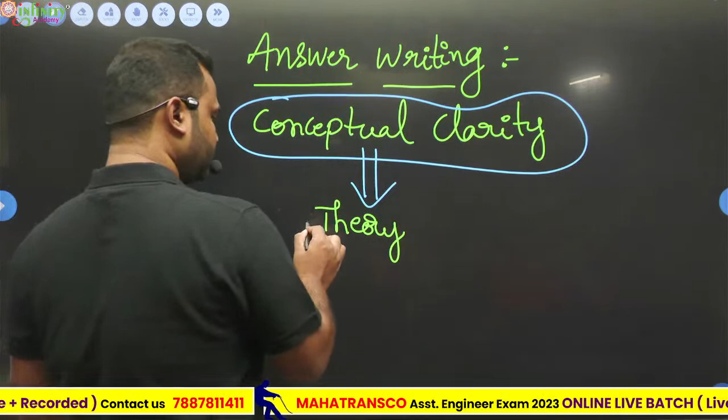After theory, any formula present in that, maybe derivation or application of that formula. In civil engineering, not all formulas are derived. There are some empirical formulas which are based on experience and experiments, mainly found in geotechnical engineering, soil, and even in our code books like IS 800 corresponding to steel and IS 456 corresponding to RCC.

IS 1343 corresponding to PSC, pre-stressed concrete structures. So likewise, not all formulas can be derived, but whatever formulae or provisions exist based on theory, you should remember. And obviously based on this formulae, we need to make use of this formula, that is the application part.

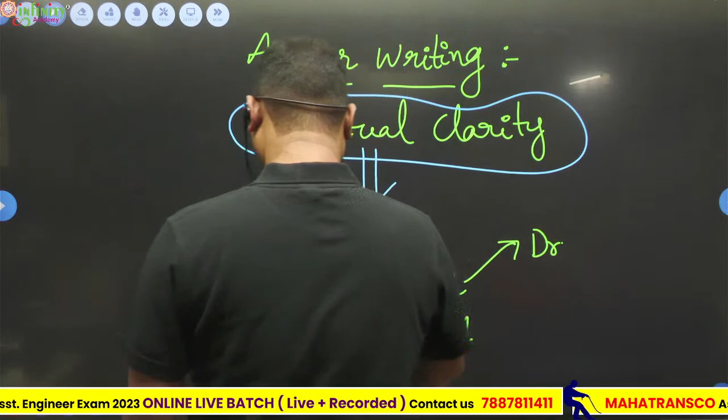Of course, these formulas, some may be derived, and some others are empirical. But whatever the formula might be, you should understand and ultimately remember it. But for remembering any formula, whether derived or empirical, one should feel the subject. It means you should be able to understand what is happening over there, what are the various terms present in that formula.

Suppose you take one simple formula. What are the subjects that are completed for you? Highway, geotechnical engineering - let us take geotechnical engineering as an example. So almost all the topics are completed. Now what's the topic going on? Shear strength. Let us take shear strength, one formula.

I'll explain how to remember it without any by-hearting or mugging up process, without any by heart. How to remember? I'll explain one or two formulae. Shear strength - generally we represent shear strength with either tau or S, whatever it might be. What is the formula for the shear strength?

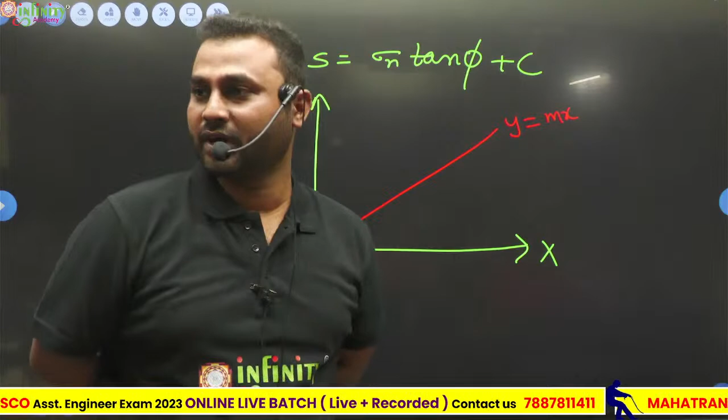So please don't commit these kind of mistakes. Then God will also not save you, he will also not come under your rescue. You should have that conceptual clarity, from the basics. From 7th standard or 8th standard, whatever you have studied, all those things you should recollect or remember. Why? Because you have crossed those phases, right? Are you past 8th, 9th, 10th, all the classes? All of you? Pakka? Then you are taking that it is y is equal to mx plus c.

It is y is equal to mx as it is passing through the origin. Right, as it is passing through the origin. And what is this equation? Equation of this line? Here, this equation of line. Y is equal to c, constant.

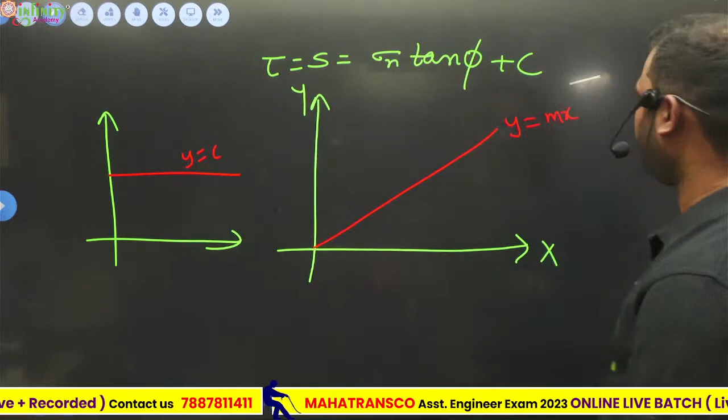Of course, c means constant. Yes, correct. And here I will draw. Now, what is this equation? What is this equation? Y is equal to mx plus c, isn't it?

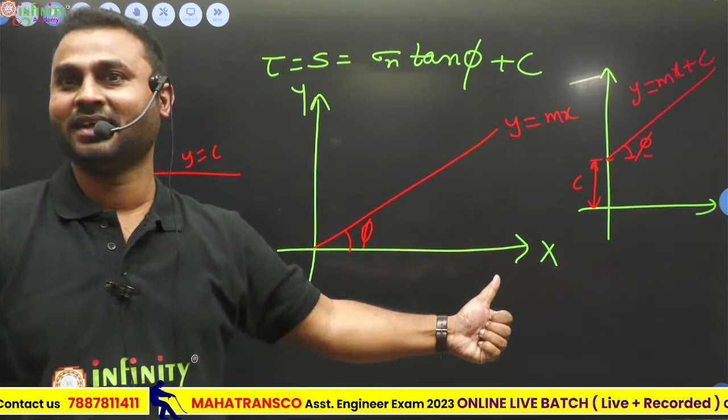These three are only the basic for shear strength formulae what you study. These three graphs are these three equations what you have studied in 8th standard, if I am not wrong. These three equations are basic or foundation for shear strength formula.

In shear strength, I think you might have studied Mohr circle. That Mohr circle is plotted between normal stress on x-axis and shear stress on y-axis, isn't it? And after drawing the Mohr circle, we draw the common tangent, which is called Mohr Coulomb envelope or failure envelope. So based on that Mohr Coulomb failure envelope, we write this particular formula for shear strength, isn't it? So now I'll compare this concept with that.

And in shear strength, you might have studied the types of soils also. What are the types of soils you have studied there? Soil is having so many classifications. Based on the size, the classification is fine grained and coarse grained. Based on some plasticity characters, there is another classification. So all those things you study in soil classification, leave it. But here in shear strength also there is one soil classification.

That is C soil, Phi soil, and C-Phi soil. So how is this classification made? Based on shear characteristics of a soil. It means any soil will possess strength mainly by 3 parameters. What are those 3 parameters? Friction, cohesion, interlocking, and adhesion. So if particle size reduces, surface phenomena predominates and the contact will be very less. Then there is no friction.

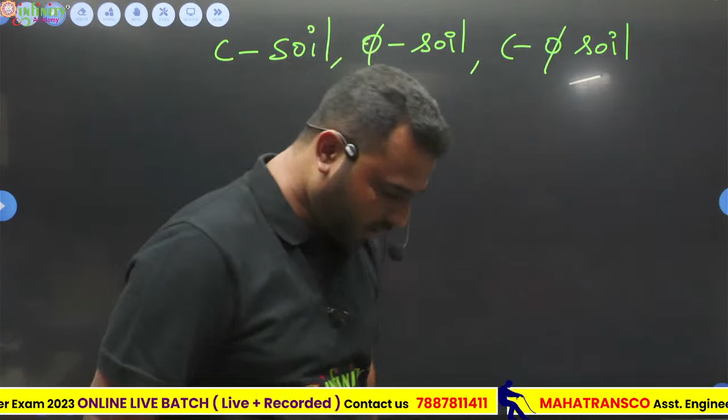So when will friction generate, please tell me. When will friction generate? When there is a contact area. I'm walking on this floor. How am I able to walk on this floor? Because there exists a contact between my foot and the floor. Because of that contact, friction will develop. That is why I am able to walk, or else I will simply slide and fall down. So for friction to develop, there should be contact area.

So for that contact area to develop, size should be more. That more size we observe in sand and gravel, but not in clay. Therefore, mainly coarse grained soils like dense sand, sand and gravel will exhibit shear strength by friction, isn't it? Whereas coming to clay particles, size reduces, therefore surface phenomena predominates. That is development of charge over the surface. Because of that, attractive forces will develop, known as cohesion and adhesion.

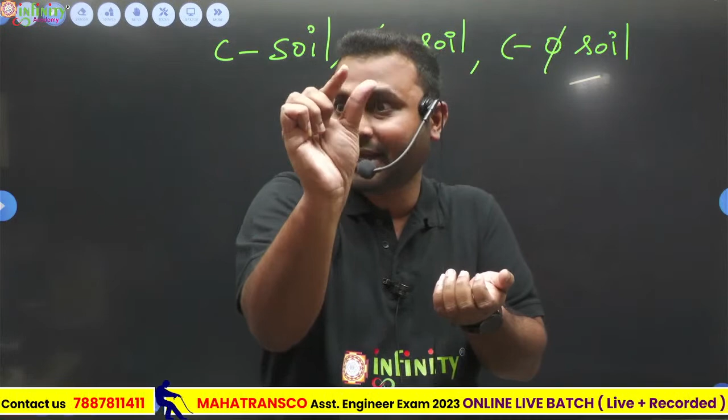And interlocking - if size further reduces, like angular particles you might have studied, interlocking will occur. Why? Because there will be some projections of the particles on the surface. Suppose this is the surface, there will be a projection like this, and for another particle there will be a projection like this, then interlocking happens. So how do we measure this interlocking, friction and attractive forces?

Based on these parameters - C, Phi, C-Phi - and based on that, there is a classification. So like this, you need to understand the subject, or like this, you need to analyze the subject, right? So now, these 3 types of soils.

Of course, if I go into further details, then we are having some different stages of testing and different drainage conditions. That is not our point of discussion at this point. Why? Because the shear strength alone will take not less than 4 to 8 hours if we discuss the total experiments and total conditions and everything. So that is not our main point of discussion. But what I am trying to tell you is how to remember the formulae, or how to see the subject, or how to feel the subject.

So if you understand the subject in a practical manner, or in other words, if you visualize the subject, what is happening in the soil, if you are able to feel or visualize what is happening inside the soil, then there is no need to learn by heart, right? Obviously, you will remember for more time, at least up to the examination. Till the end of the examination, you will remember it. That is what is required, right?

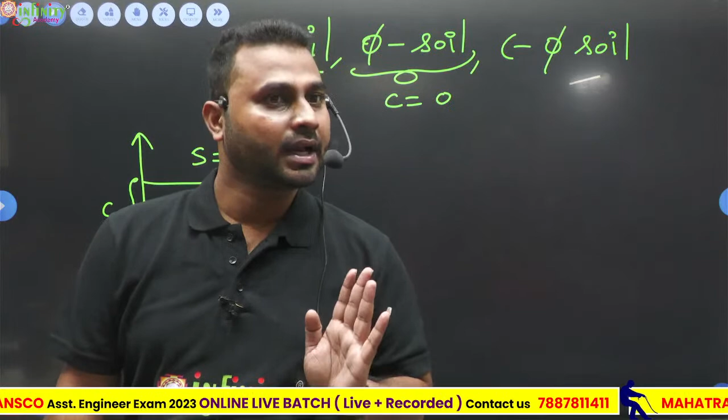And the test can be done perfectly in 2 stages, the confining stage and the shear stage. And all the drainage conditions like UU, CU, CD can be achieved in the triaxial test. Isn't it? So based on that, we can derive phi and C. Those are called shear parameters. So whatever experiments we are going to carry out, all of them are meant to determine shear parameters only. And based on the shear parameters, we can determine the shear strength of a soil corresponding to its type.

Means all soils don't possess the same type of shear properties. Some soils will have some properties only. And even if you see C soil, okay, C soil, the best example of C soil is clay. But see, the very same clay behaves in one manner in undrained condition and in a different manner in drained condition. In undrained condition, it exhibits cohesion, whereas in drained condition, it exhibits friction. So we need to be very careful.

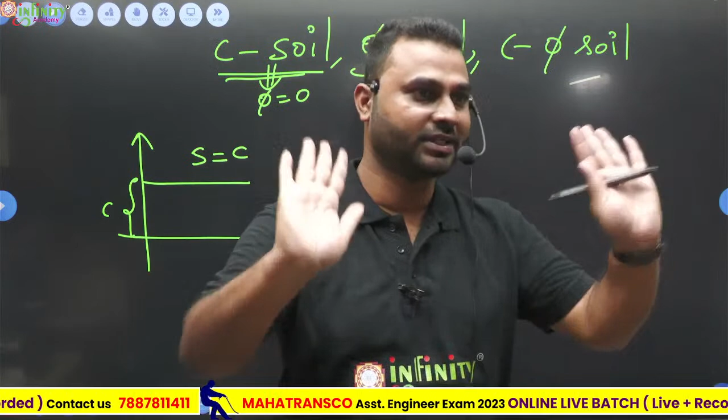See, why is this topic, or why is soil, most complicated? Because there are so many aspects you need to consider. Let me give one small example. If the route to your home is straight, then you will easily go. Yes or no? Even when you are sleepy, you can go very easily, right? Whereas if there are so many turns, U-turns, if the full route is complicated and not straight, and you need to climb a steep slope, then you will feel it is complicated or not? You know the destination, but the route is not straight, so you will feel it is somewhat difficult.

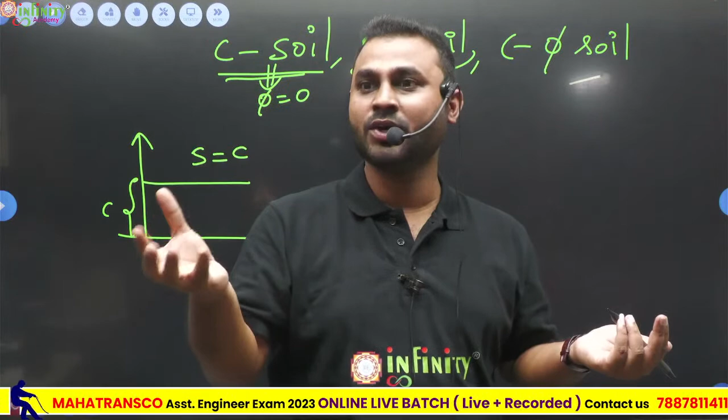The same case with soil also. It is not straight. So many turns, right turn, left turn, U-turn, and even steep slopes are there. That is the reason you feel somewhat complicated with this subject, but it is nothing like that. Provided you are clear with all the aspects, then it is very clear. But it requires time, and you need to study it and understand it more and more. Ultimately you need to spend time. When the route is not straight, obviously you need to spend more time to reach the destination. The same here, that's it.

So you should have that patience, right? The patience, that interest and everything. Ultimately, you are the one who needs to reach your target, right? We are like guides, to show you the right path and to shed light on your path, so that you will feel a little comfortable. That is our part, nothing more than that. Don't think that merely joining an institute, not only this one, any institute, will serve the purpose. You are the one who has to reach your target ultimately. We teach you and guide you in the right direction, and wherever you feel demotivated, we motivate. That is our main role.

Okay. Now coming back to this. So this C we can determine. This is the shear strength. So S is equal to C. This is like Y is equal to C or not? Now here phi is 0. Then what should be the graph? Here the X-axis represents normal stress and the Y-axis represents shear stress.

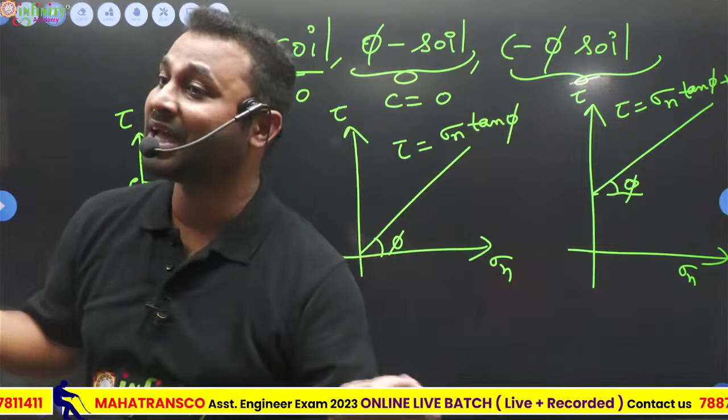Why? Because the very same formulas you have studied in your 8th standard in mathematics, coordinate geometry. But the thing is, you are unable to interlink it. See, whatever subject you study in engineering is not new to you. It is just an extension to the concepts and subjects you have studied in your elementary level, after that secondary level, and in your +1 and +2.

So what generally happens is there is a missing link between the things you have studied in school, +1 and +2, and in graduation. It means you have studied up to here, maybe up to this level, maybe in surveying you study RLs and everything. So this is the level you have studied up to plus 1 and plus 2. Now, in graduation, you study from this level. Now, this is the gap. This is what is missing.

Because of that, you think all these subjects are new to you, and you will obviously feel bored. Why is the subject always boring? Because you are unable to see it or visualize it. Suppose you take a movie. You remember it for maybe a lifetime. Sometimes you yourself feel like the lead actor or actress, right? Why? Because everything is happening in front of your eyes, so you feel it for sure.

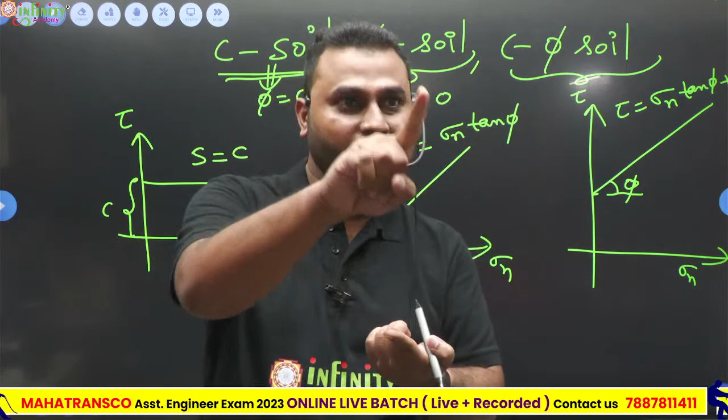If you apply the very same thing to the subject, then definitely you will start enjoying the subject. As I told you, there is a missing link. If there is a bridge for that gap, then obviously you start feeling it, you will find it interesting, and ultimately you enjoy the subject. That is the point. So see how simple it is.

Not only this, in the very same topic, one master formula is there: sigma 1 is equal to sigma 3 tan square theta c plus 2c tan theta c. That formula also we can derive from simple mathematics and the Pythagoras theorem. All of you are aware of the formula for sin theta, tan theta, the Pythagoras theorem, and some trigonometric relations, sin 2 theta, cos 2 theta. With this we can derive that formula. Nothing new. But what is the main difference? That is what I am trying to tell.

In your elementary level, 8th or 9th standard, you don't know the application of the formula. You simply study sin 2 theta means 2 sin theta cos theta, and cos 2 theta means cos square theta minus sin square theta. Or sin theta means opposite side by hypotenuse, cos theta means adjacent side by hypotenuse. That's it. Pythagoras, everything you study, but you don't know the application. But here, we make use of those concepts in practical scenarios.

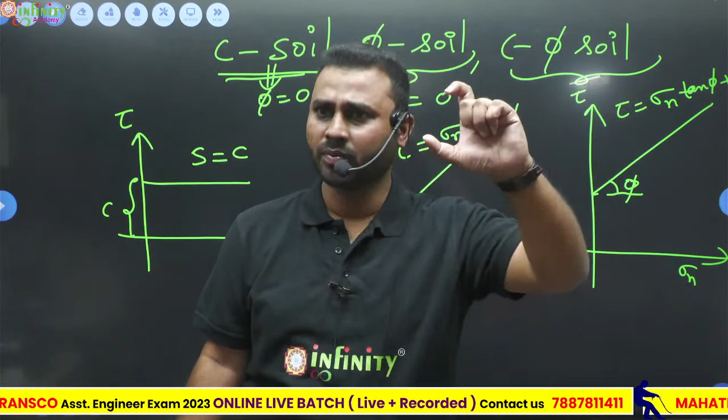Properties of a circle are also well known to you, right? That is Mohr's circle, named because it was given by Mohr. And it has some significance, which you study in strength of materials. And one more point, please remember: if you are studying one subject, please don't confine your imagination and visualization to that subject itself. Interlink it. This total Mohr circle concept has its root in strength of materials. We picked it from there and use it for studying shear strength.

Take the same soil: you might have studied seepage, permeability, effective stress, right? Now what is meant by seepage? Flowing of water. Therefore, we make use of fluid mechanics concepts: hydraulic head, datum head, pressure head. Have you studied it? That is from fluid mechanics, not from soil. We make use of those concepts in soil.

Likewise, every subject is interrelated. Okay, interlocking will be there in every subject. So try to interlink the subjects. So all these things, as I told you, try to visualize the subject by knowing what is happening exactly there in the subject and try to interlink it.

So all these factors ultimately make you feel the subject, and if you start feeling the subject, then obviously you feel it interesting, then you start enjoying it, provided you remember it for more time. As I told you, at least until the completion of the examination, isn't it? That is the point to be noted.

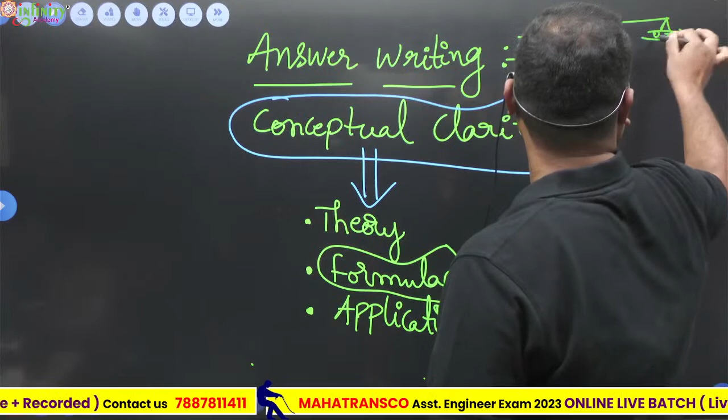Here I'm giving you just a few examples. Why? Because in this session of 1 or 2 hours, we can't discuss all the subjects and all the formulas and theories present in civil engineering. Civil engineering we basically study for 4 years, right? That 4-year subject we are going to consolidate in a span of 2, 3 or 4 months. That course I can't further consolidate into 1 to 2 hours. That is the reason I'm giving just a few examples. But every subject, every topic in the subject and every theory in that topic will have the same thing.

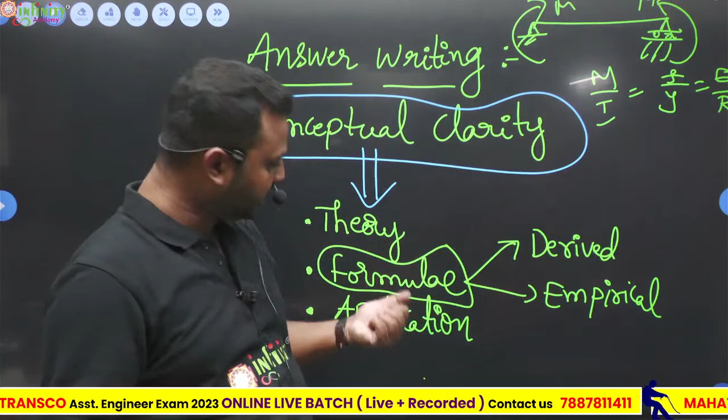Understanding the theory and any formula present in it; that formula may be either derived or empirical. As I told you previously, in soil, that is not a derived formula, that is an empirical formula. Even though it is empirical, it has a basic concept. That is what I explained to you. Shear strength S is equal to sigma tan phi plus C is not a derived formula. It is an empirical formula.

But still it has a background or basis. As I told you, empirical formula means it is based on experiments and experience. That experience may differ from person to person. I have one experience with the subject and you have another, right? That is why it is called empirical, meaning not universal. Whereas derived is universal. If you apply the same logic, same concept and same aspects, definitely you will get the same formula. Even I get the same formula. Everyone will get the same formula.

That is what derived means: it is something which has universal approval. Okay, right. So that is the form and application. Clear, all of you? These things you need to keep in mind.

And one more thing, we at Infinity are going to start a question practicing session exclusively. I think your exam is on October 14th, right? So time is very less. The subjects will run parallelly. But along with that, we are planning to launch a question practice session only, for which I myself will frame most of the questions, so that you will benefit more and at least be able to answer the required questions.

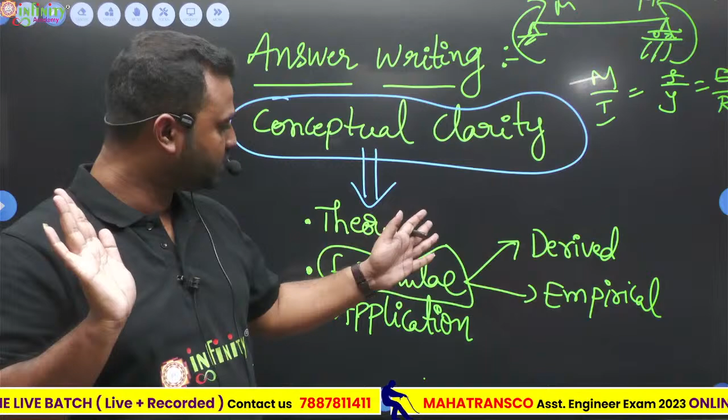Once again I repeat, merely by remembering the formulas, you can't run the show here. If you only remember the formula, you'll go to the examination hall with the formula and come back with the same formula. No answer, nothing. So please try to keep these things in mind, whatever subject you start studying, immediately after its completion.

As of now, I think you don't have any questions to practice. But nowadays everything is at your fingertips, in your hand. So try to search for questions for the time being. Of course, we will provide them, don't worry. But as there is a time constraint, start seeing some previous year questions, because MPSC was descriptive till 2011. After that, the pattern changed to objective.

In internet sources you may get some of those questions. Better, solve Engineering Services previous year questions, or SSC JE previous year questions. These exams are descriptive examinations. If time remains, you can solve IAS and IFS previous year questions from civil engineering. If you are really serious and dedicated towards your goal, lot many sources are there.

For MPSC, UPSC or SSC, the syllabus is civil engineering, yes or no? For us it is civil everywhere. In civil, strength of materials is everywhere, shear strength is everywhere, the same formulas. But the difficulty of the questions may vary. Sometimes it may be straightforward or easy, sometimes lengthy, and sometimes tough.

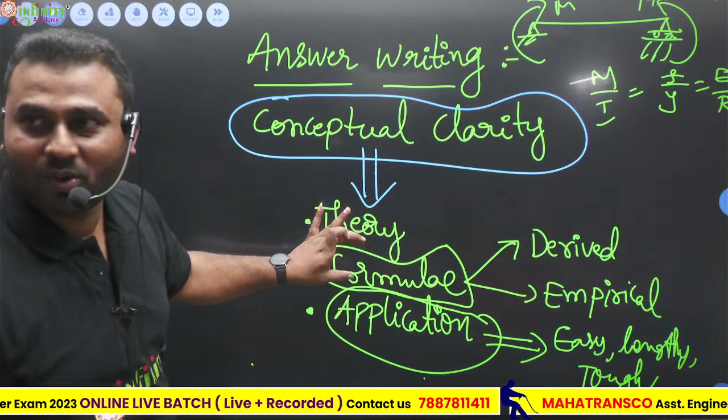More or less, those who have joined any institute or those who have started studying, no doubt they will learn theory and formulas in that. But the only thing that lacks is application. Obviously, that will decide whether the question is easy, lengthy or tough. So everything in question solving is directly related to this application. But you can go to this application after knowing the theory and formulas in it, isn't it? This is what conceptual clarity exactly means.

Now coming to the questions, mainly we are having two types of questions, isn't it? So types of questions and their evaluation. Evaluation means allotting the marks or correction, how many marks we may get for those types of questions. So generally there are two types of questions. I think you are aware of it. One is theoretical and another is numerical, right? So these are the two types of questions.

Now coming to the theoretical question, however well you may write or however effectively you may present your concepts and knowledge, still you are not going to get full marks here. Even if you are Shakespeare, you don't get full marks here. But still you need to attempt it. Why? Because the question paper will consist of both theoretical and numerical. It is the perfect combination between those two. Hence you need to attempt both.

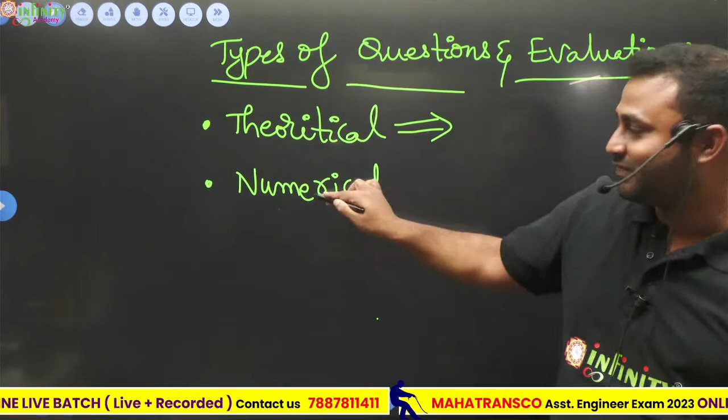But what I am trying to tell here is, if you need to choose between theoretical and numerical, which is better? Numerical, provided you have good practice and you are aware of that question. Without that, you can't attempt the numerical, right? In comparison, no doubt, numerical is difficult. But if your formulas required to solve the question are correct, your procedure is correct, and the final answer is correct, then you will get full 100% marks.

But in theory you will get 80 to 90, and in some cases 95 percent marks; 95 is a rare case. But in numerical, 100% marks. That is why, if you have any chance to select between theoretical and numerical, the best to choose is numerical. If the formula, approach and everything is correct, and the final answer matches, you will get full out of full. But in theory that is not the scenario.

But you can make that judgment only after having good knowledge and being well practiced. Or else nothing, simply blank faces in the examination. Knowledge is not merely sufficient. If knowledge plays one step in answer writing, then practice plays the remaining nine steps. So knowledge, practice, practice, practice. That's it. Nothing more than that. As you are aware of the quotation, practice makes man perfect.

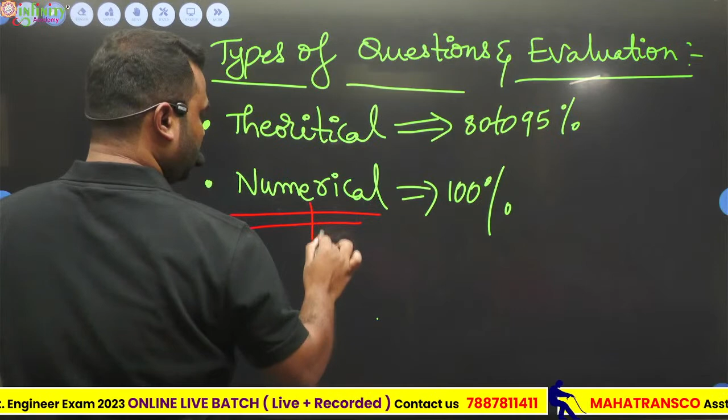Okay, formulas are correct and approach is also correct. See, this is based on experience. This is not exact, this is like exit polls. It is not an exact result, right? Based on the experience I am sharing with you. So if approach is correct and final answer is not matching, it's still not wrong.

So final answer what you have got is not matching with the correct answer. Then suppose the question is for 10 marks. Chances are there for you to get 5 to 7, or sometimes 5 to 8 marks out of 10. Why 5 to 8? Because no one knows how exactly the examiner is going to allot the marks. But one thing is for sure, he will not cut you the total marks, provided your formula and approach is correct.

Somewhere in the calculation you have done the mistake and final answer is not matching with the correct answer, then total marks definitely are not going to be cut. Definitely will get the marks. So more than half only you are going to get. That is why I have given here 5 to 8 marks. Sometimes if examiner is in good mood and of course he is having empathy towards the students or candidates, then he may give 9 marks also. Depends, but not full marks. That is for sure, he will not give full marks and he will not cut full marks. That is for sure. Between, the gap is there. That gap no one knows.

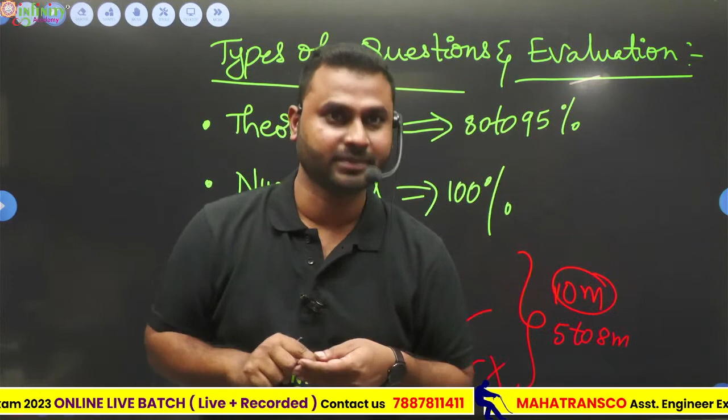Like you take in RCC, there are so many provisions. Suppose you take cover, for slab the minimum cover is 20 mm. It means you can provide up to 100 mm also. Minimum should be 20 mm, there is no upper limit. So as per our wish we can do the same. Here also full marks are not going to be cut and full marks are not going to be allotted in between. So based on the experience, 5 to 8 marks we are going to get.

So that is why I'm telling you, final answer matters, but formula and approach - approach means that application, using how to make use of that formula - that should be correct, and formula has to be correct too. Then you will get, as I told you, a good number of marks, not full marks.

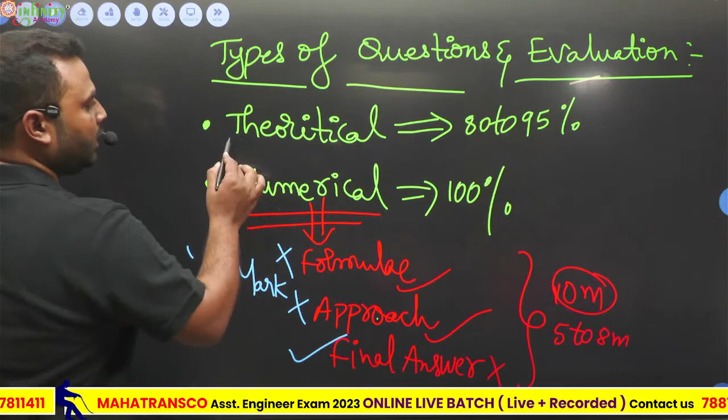But as I told you, for theoretical questions also, don't write like in your semester examination. Straight away they will cut it. There should be bullet points. It means for answering this theoretical question, basically you need to remember some points here: introduction, explanation, and then conclusion.

These are the 3 things that has to be maintained for every theoretical question, but not all the time - this is the framework. Here for numerical question: formula, approach, and final answer. And of course, initially you need to write the given information.

But this given information will not have any marks, okay? Just to tell the examiner that you are aware of the information given in the question. Just to tell the examiner, that's it. For that you need to write given.

But like in our semester, for given also 2 marks will be there, right? And for filling the mark sheet, additional papers or additional sheets, we are having some marks of 2 marks. That is not valid in public service commissions. Okay, that is not valid. So don't follow that strategy. Straight away you will get 0 marks.

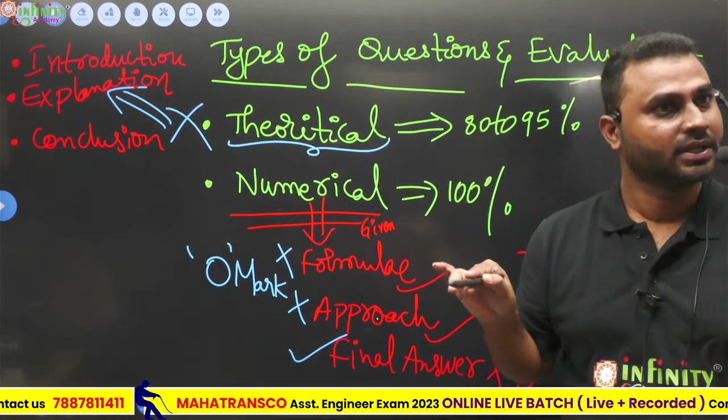Right, so given - first you need to write it so that examiner will come to know that you have gone through the total question and you are well aware with the given information. So write it and then start the formula. Write the formula by writing 'we know that'. But some formulas in the examination, as per the question, we can't derive it. Of course they might have some background and some derivation.

But in that question, derivation is not required. So you write 'we know that' and write the formula, and substitute the given information in that formula. And sometimes not only one formula, some 2 to 3 formulas we need to make use of. That is what the application and approach means.

Okay, that is what the application and approach means. Finally, by carrying out the calculation, we get the final answer. Somewhere here, as I told you, we made a calculation error, so the final answer is not matching. But still, the formula and approach are correct, so we will get the answer.

This is how to write the numerical question. This is the framework for numerical questions. Whereas for theoretical questions, this is the framework.

Introduction. So this introduction includes definitions. Maybe some definitions will be there, or some other bullet points related to that particular topic, and then explanation, and then conclusion.

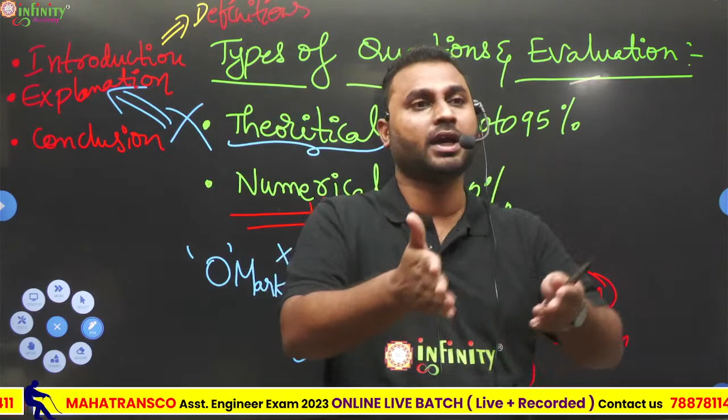Now, in MPSC also, chances are there for the same trend, because in MPSC mains objective pattern, I have seen so many questions directly picked from engineering services prelims. Previously it was the objective examination. So in the previous year papers, if you take engineering services prelims papers and MPSC mains objective papers, most, not all, but some questions are directly picked from it.

Like some questions I remember in structural analysis, SCA - matrix questions, previous questions are there, directly picked from engineering services prelims. Not only from SCA, even TOS, some questions from soil, like that. For every subject there are some such questions, but I don't remember exactly, though I've analyzed it.

So based on that trend, I'm telling you, here in MPSC mains also they may follow UPSC engineering services mains, or civil services mains, or IFS mains. Chances are there based on the previous trends. Always remember one point: no one will give you the exact analysis.

I told you, like, if you are aware of elections, before elections itself some surveys will be done, right? They are called exit polls. In the very same way, here we are doing it for you. They are not exact - sometimes the total exit polls may go wrong. Sometimes. But sometimes more or less the exit polls are correct.

Not exactly, but correct. So don't take it for granted - that is what I want to share with you. But more chances are there because it is based on past experience, based on the past 10-20 years of experience and trends, and that's what we are sharing with you.

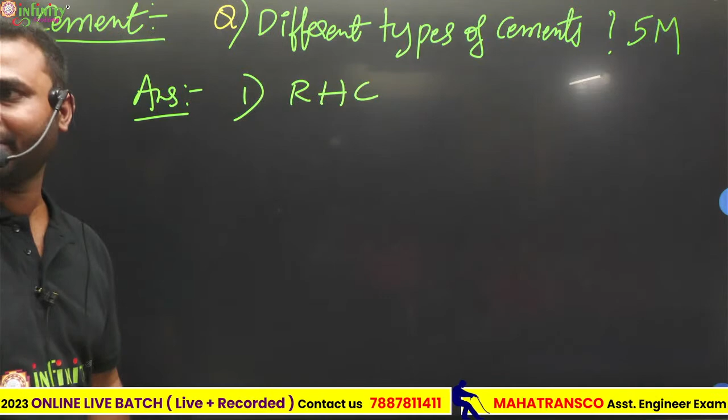Different types of cements - explain about different types of cements. If this question is given for 5 marks, there's no need of elaborating. So what are the different types of cements? First, rapid hardening cement - write elaborately about it. Then extra rapid hardening cement - be brief about it, just explain why it is used.

So basically in rapid hardening cement, we are going to increase C3S more. For extra rapid hardening cement, along with this we are going to add CaCl2. Just brief it, no need of going into details.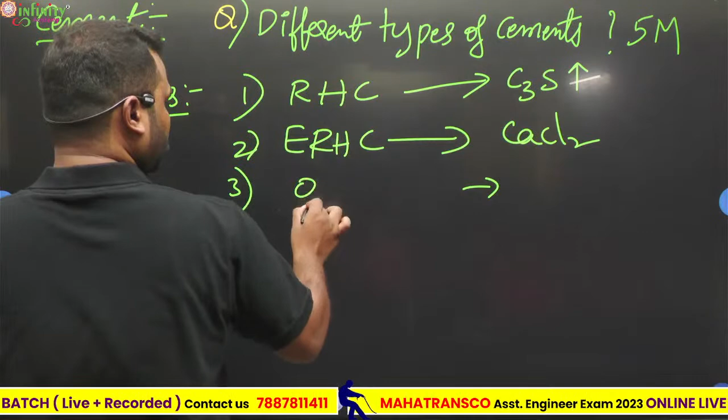Then rapid hardening, extra rapid hardening, quick setting cement - QSC. Why elaborate it? In quick setting cement, C3A is more and gypsum content is less. Like this you need to brief it - not elaboration, just brief it, because it's 5 marks.

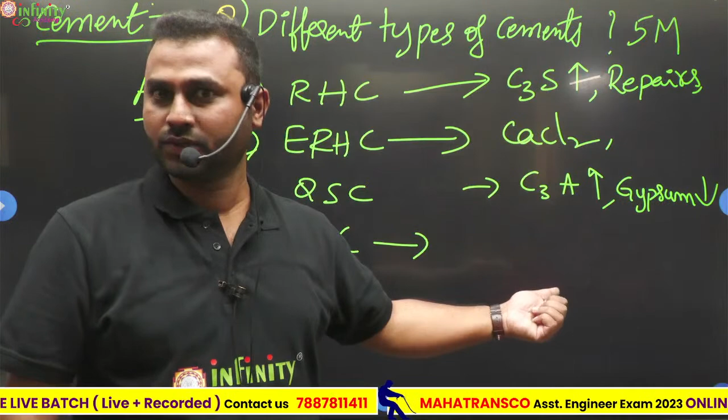Then rapid hardening cement - write where we are going to use it. Generally this is used for road repairs, where form work has to be removed quickly, and here the same functions apply even in cold climate. Also quick setting in water retaining structures, we can use it. So these are the briefing points for rapid hardening cement.

So in low heat cement, C2S is more, and C3S and C3A is less. Mainly we use this in mass concreting, like in dams and raft foundation. And then after low heat cement...

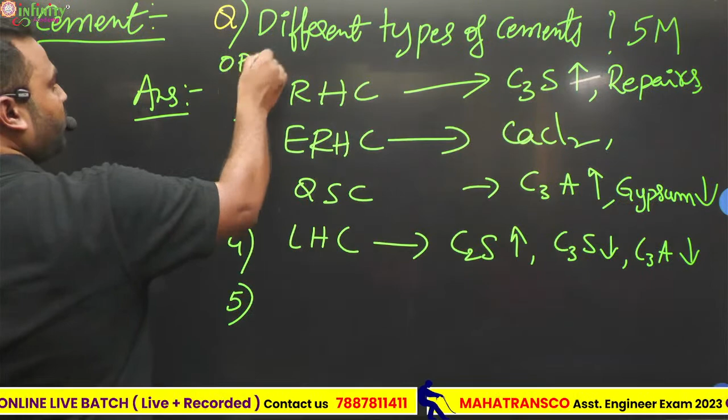What I'm trying to tell you here is I'm giving you the cements which can be obtained by varying the constants of ordinary Portland cement. Basically cement is OPC - ordinary Portland cement - which consists of the bogue compounds C3S, C2S, C3A and C4AF. By varying these constituents, we get these different types of cements.

Whereas PPC, or Portland slag cement or high alumina cement, are types of cements where we change the total constituents of the cement. Is it clear? That's how to remember things, so even in this theoretical subject you don't feel difficult remembering more and more.

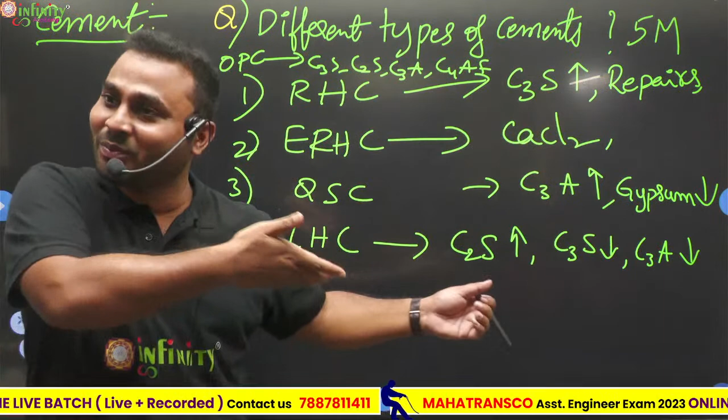These are rapid hardening, extra rapid hardening, quick setting, low heat - all these are cements derived by varying the constants of ordinary Portland cement. So if you study clearly about ordinary Portland cement and the various components present in it and their functions, then easily you remember it. That's how I remember it - currently I don't have any book with me, but I remember because I know the total constituents and their function. I simply wrote this, that's it.

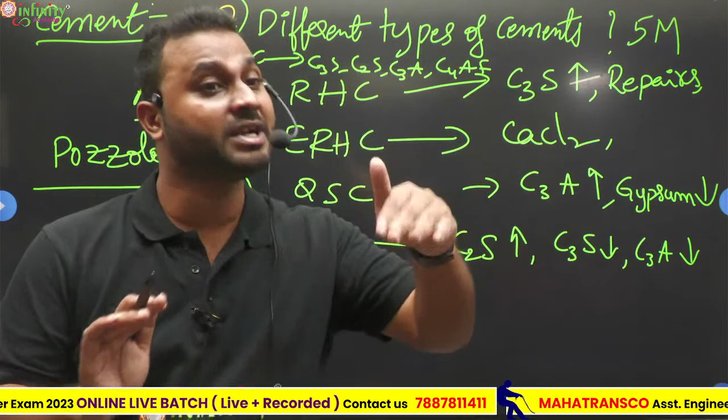Now one more cement is pozzolana. So basically what are pozzolanas? Pozzolanas are siliceous materials. They themselves have no cementitious property, but they exhibit cementitious property in the presence of free lime. If you see the hydration reaction of cement, we get CSH gel, tobermorite, plus CaOH2.

Actually this is portlandite. Now this pozzolana material reacts with that portlandite and again forms CSH gel. So in that way we are going to get pozzolanas - we make use of it.

So what are the examples of pozzolana? Fly ash - so many pozzolanas are there: fly ash, GGBS (ground granulated blast furnace slag), metakaolin, and rice husk, so many are there. Based on that we have PPC - Portland pozzolana cement, and slag cement - Portland slag cement.

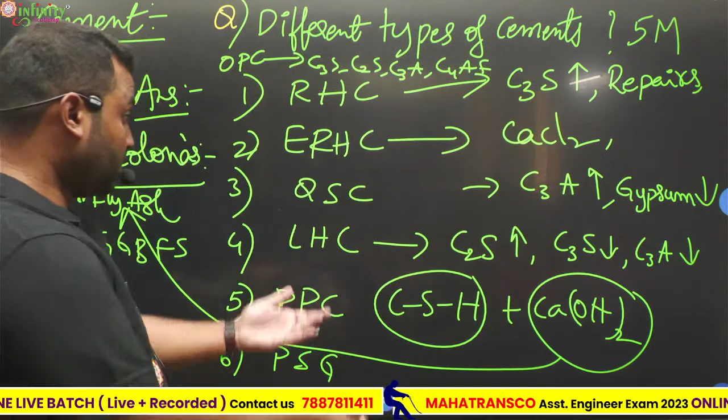One more cement I forgot from OPC is sulfate resistant cement. In this, we decrease C3A. Actually these total 5 are the cements derived from OPC. Next, PPC, PSC, and then high alumina cement - just simply write about those names and brief it, and you'll get 5 marks.

But if the same question is given for 20 marks, then how to write? You need to start with the history of cement, meaning introduction. So cement is basically made from 2 categories of compounds - what are those? Calcareous and argillaceous. In calcareous, the main compound we get is lime - of course so many other compounds are there, but major is lime.

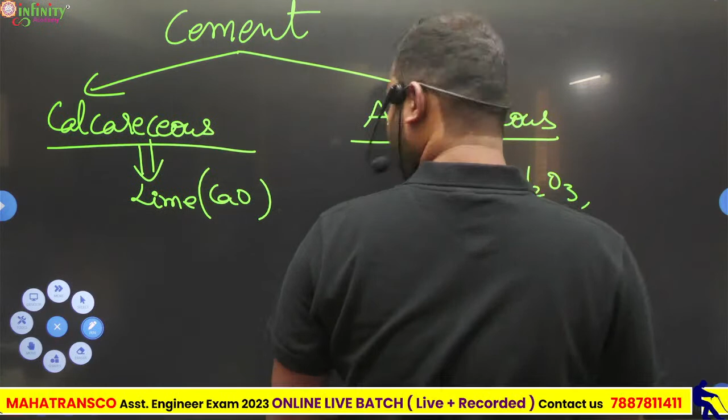And in argillaceous, the main compounds we get are silica, alumina, and some impurities like alkalis, and SO3, and MgO is present in both. These are the major constituents. So to remember the constituents of cement, please remember this code: LSAIM. L stands for lime, S stands for silica, A stands for alumina, I stands for iron oxide.

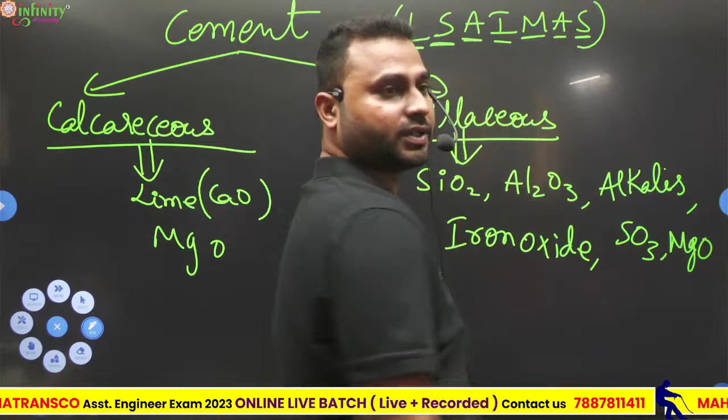I stands for iron oxide, right? Iron oxide. M stands for magnesia, A stands for alkali, and S stands for sulfur trioxide. So in the same order. So generally lime is present in 60 to 65%. And next silica, next alumina, next iron oxide. So this is what first you need to write.

This is how the cement is going to be manufactured. By making use of these compounds, we are going to get a clinker in rotary kilns. Now that clinker we are going to grind to fine particles. During that grinding we add 2 to 3% of gypsum. Then finally we will get the cement. Now in that manufactured cement 4 compounds are present. Those are called Bogue's compounds.

So now what are those Bogue's compounds? Directly I am writing C3S, that is tricalcium silicate. C2S, dicalcium silicate. C3A, tricalcium aluminate. C4AF, tetracalcium aluminoferrite. So briefly we need to write about all the constituents and their properties, and then we need to come to the different types of cements.

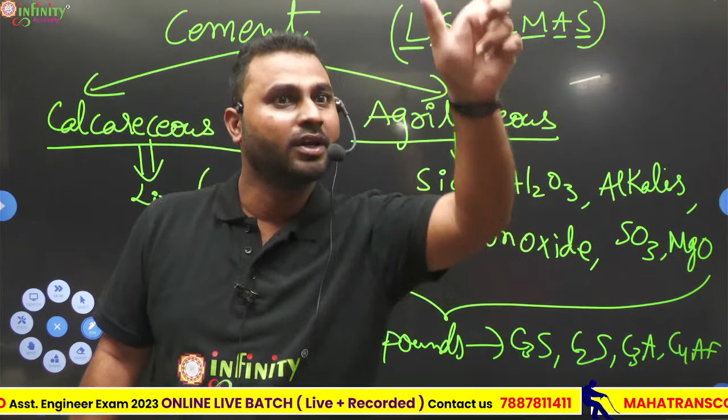If the very same question is asked for 20 marks, chances are there. Don't think that is only a 5 marks question. Or sometimes they may ask you how the workability of concrete can be affected. If the same question is given for 5 marks, then you write just the parameters. But this question was given in the recently concluded Engineering Services Examination for 20 marks. Then you should write what is workability and all the factors affecting workability, and you need to explain it.

So for that you should have conceptual clarity. Without that conceptual clarity, you can't do it. If you don't understand the subject or feel the subject, then you need to remember everything by hearting, and that is not possible. By hearting, you can remember for a very short span, maybe 1 day, 2 days, or at most 1 week or 10 days. Not more than that. Obviously, you are going to forget it because the subject is volatile in nature. Easily it will evaporate from our brain.

So that is what I am trying to tell. In the question solving session, this is how we are going to discuss. We are going to target each and everything, whether it is a small topic or big topic. Wherever that logic or particular concept is there, we are going to elaborate it in detail. This is how the theoretical question has to be answered, isn't it? Clear, all of you? That framework you should remember. But it is not valid for all questions. It depends upon the marks allotted to that question. But that framework should be there.

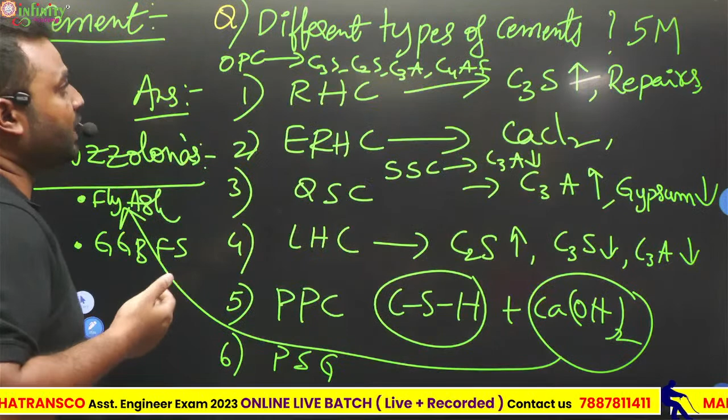If I was supposed to answer this question for 5 marks, this is how I answer. But if the very same question has to be answered for 20 marks, then we need to give the total background, explaining all the functions and properties of Bogue's compounds and their proportion present in the cement, and then going for the different types of cements. Clear, all of you? This is how to answer a theoretical question.

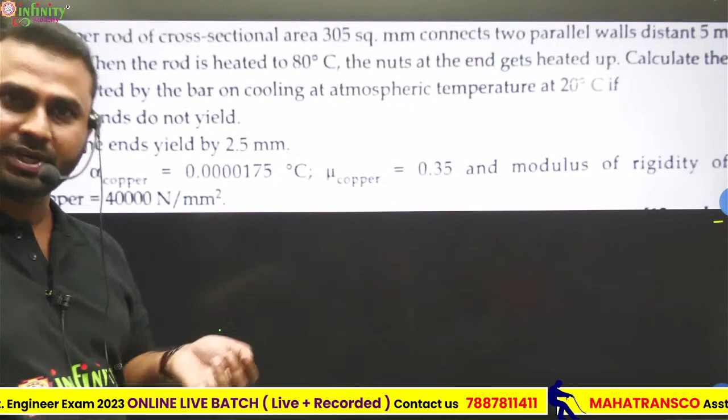And of course, I explained how to answer numerical questions also. I'll take one question so that you'll understand how exactly we need to answer. With that, I'm going to conclude today's answer writing session. See the question, it is from strength of materials. It is not done in this course, but you have some knowledge and required things I'll explain, don't worry. Please go through this question.

And even online students, sorry, I forgot about the online students. Let me see what's going on over there. Meanwhile, please go through this question. Roshan, sir, solve any one numerical. That is what I'm doing here. Generally you people are in a hurry mode, right? Don't worry, please leave that hurry, I'll take care. I don't know Marathi, English I am very comfortable, and you can text your message in Hindi as well. For Marathi, you need to teach me. Any other doubts from online students so far? Arshita, the session started around 10:40. If you have any doubts, please ask, both online and offline.

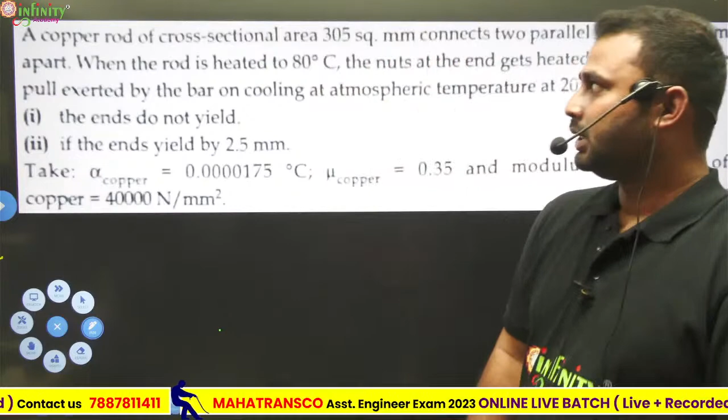So basically this question is related to the temperature stresses topic in strength of material. And that too, this is of basic level. Temperature stresses topic will have so many subtopics, obviously. See, in any topic, we are having some subtopics. So this is the basic question, or you can say primary level question in temperature stresses. Even though it is not completed to you, here I'll explain you the required things.

Temperature stresses. So the main basic concept that is required to solve this question or to enter into the temperature stresses concept is, as long as there is free expansion or contraction, there are no thermal stresses developed. That is a simple concept required. See, at this time, this seems to be very easy or simple to you. You may think that why I am repeating again and again. But without that, you can't solve this question. That is what application means. How simple it is, you say.

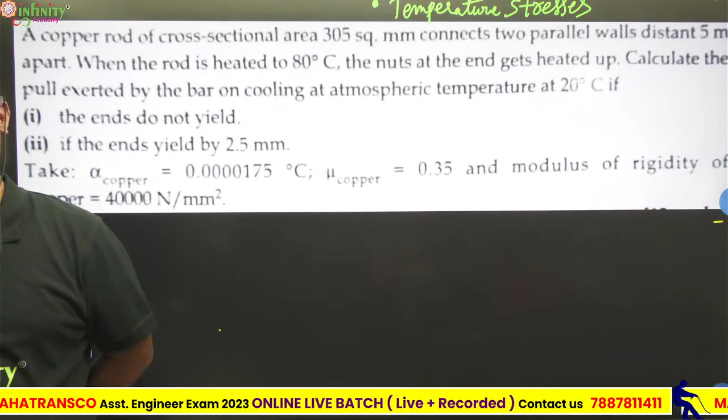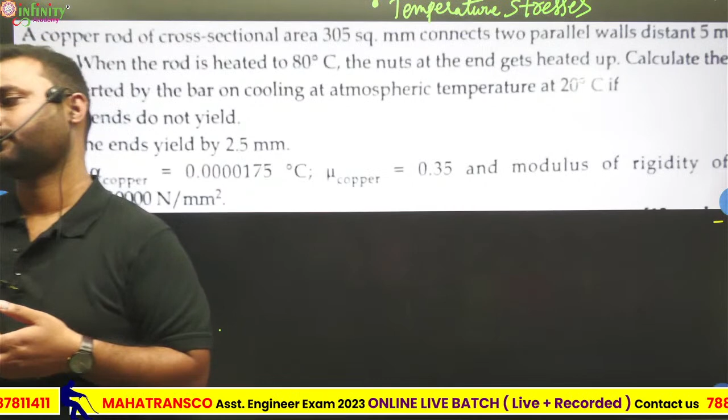As long as free expansion or contraction is permitted, no stresses. What does it mean? If those free expansion and contractions are restricted, then obviously thermal stresses will develop. This is the concept behind it. Now solve it. Please try to solve it. So just think over it. Here it may not be completed, but I think most of you are having some knowledge about stress, strain, and elastic constant relations. So just give a try to it. I'll explain, no worry. Online students as well, you please try it.

So have you gone through the question? See then how to solve this question. Actually, two questions are there. Okay, so first let me explain you the given information. So see here, a copper rod of cross-sectional area 305 millimeter square connects two parallel walls at a distance of 5 meters apart. It means these are the two walls like this. This is one wall. This is one more wall.

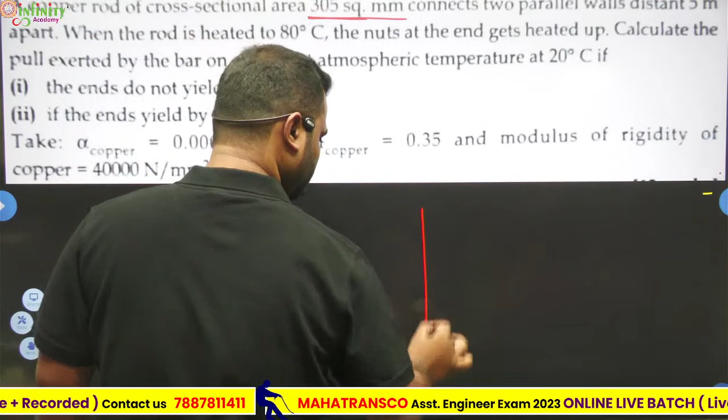Now here, this is the copper rod, right? What is the distance here? 5 meter. These are the two parallel walls and the copper rod is kept in between. The distance between those walls is 5 meter. Now, during this connection or fitting, this copper rod is heated to 80 degrees centigrade. That is what is given here: when the rod is heated to 80 degrees centigrade, the nuts at the end get heated up.

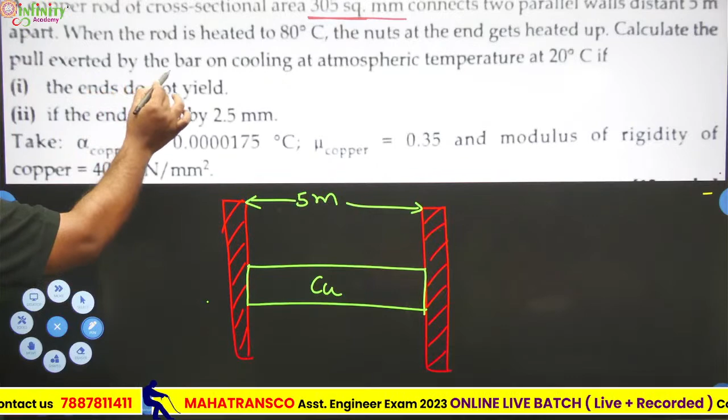Now, calculate the pull exerted by the bar on cooling to atmospheric temperature at 20 degrees centigrade. It means that during the making of this assembly or fitting, temperature is 80 degrees. Now after that, temperature is brought down, so is it heating or cooling? It is cooling. First that you should understand. So because of cooling, what will happen? Expansion or contraction?

Contraction. Okay, because of cooling, contraction will happen, right? So, what is the formula for the free expansion? Do you know that? Exactly, alpha, or you can say L alpha delta T. Right, the thermal expansion or contraction formula, I think you might have studied it in 8th standard if I am not wrong. Okay, 8th or 9th standard.

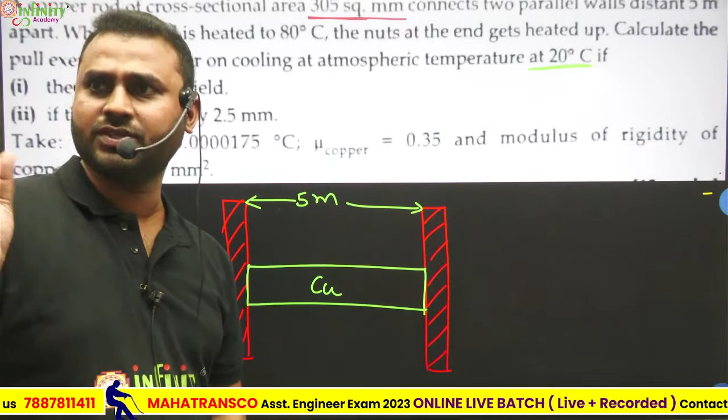So, here it is a cooling, right? Here it is a cooling. So, cooling means it is contraction, that you should understand. Therefore, free contraction. Let it be delta L. So, what is the free contraction formula? Delta L is equal to L alpha delta T. Isn't it? This is the free contraction formula.

Now, you please substitute that. What is the length of the copper rod? 5 meter, right? Use calci, right? See here, as you are targeting the mains examination, calci should be with you. For objective, it is not allowed, but here calci is allowed. So use calci. What is the length here? So 5 into alpha. Alpha is how much given in the question? Please tell me. Just a second, let me see.

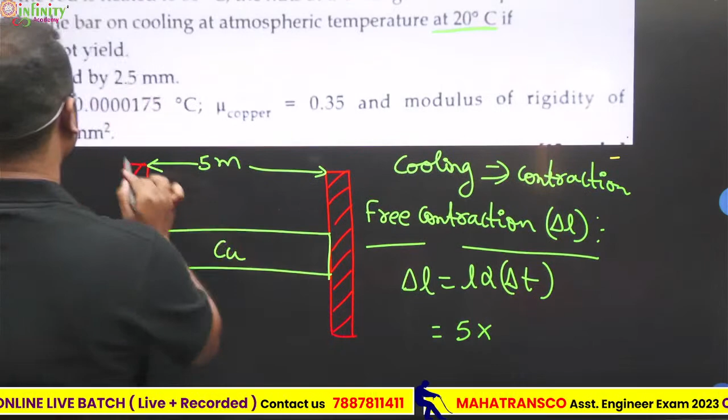Isn't it? 17.5 into 10 raised to minus 6. And what is the change in temperature? 60. 80 minus 20, 60. Correct. Yeah, tell me the answer. 10 raised to minus 3. After that, is there anything missing?

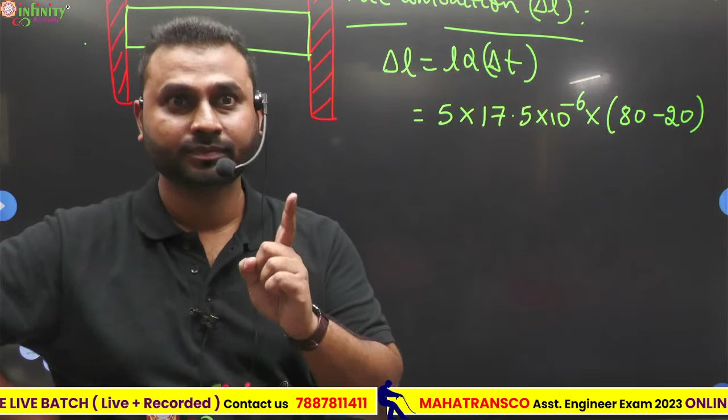Units. You need to be careful with units as well. Here, what is that parameter having unit? Alpha. Is there any unit for it? Per degree Celsius. For this delta T temperature, having any unit? Degree. So that degree will cancel. So therefore, alpha delta T has no unit. Then which parameter is having unit? L. Now this L we have taken in meter. Then finally we are going to get in meter. Convert it into millimeter or keep it in meter itself. Okay, keep it in meter itself. So tell me in meter.

5.25 into 10 to the power minus 3 meter. Everyone got the same? This much the free contraction that copper rod can exhibit, but will it do so? See here at the ends, there is a connection like this. So it can't move, isn't it? So at the end, the copper rod is tightly fixed. It is connected to that wall. Therefore, it can't move. Whether the expansion or contraction, it can't do it. It is not possible.

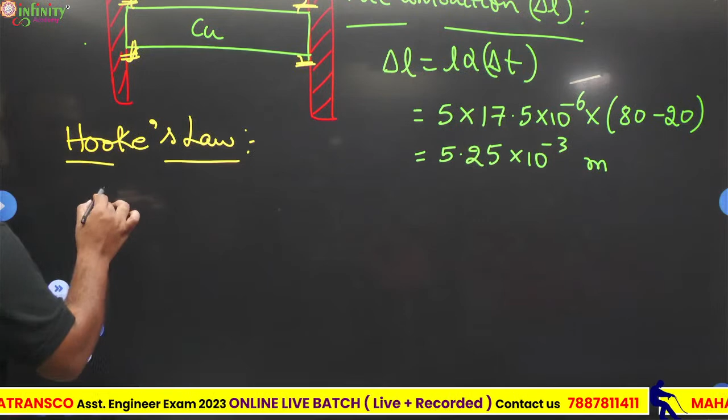But if it is not restricted, then how much the free contraction this particular copper can exhibit? This much. So this is restricted. Corresponding to this, stress will develop or not? So a simple concept of stress. So tell me the Hooke's law. See, here I am not only solving the question; as the strength of materials is not completed, I am briefly revising the required concepts also. But in examination, no need to write Hooke's law and all the things. Hooke's law: stress is equal to Young's modulus into strain.

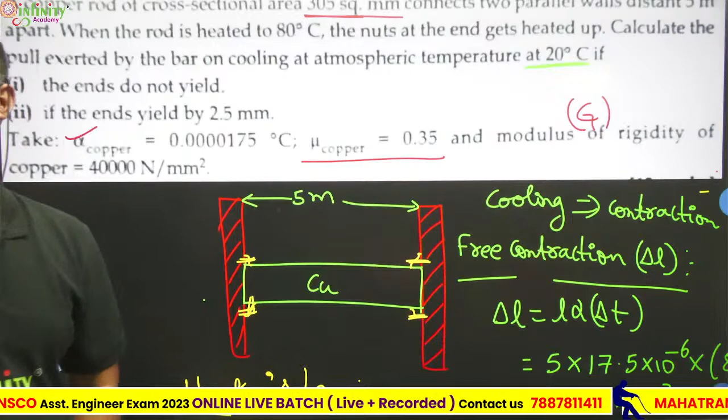Now what is strain? Strain is nothing but change in dimension by original dimension. So now in the question, please see whether this is given or not. E is not given, but what are the information that are given in the question? Of course, alpha we have made use, right? See, you need to write given information also. Now, Poisson's ratio is given, and modulus of rigidity means G. Now, is there any relation between G and E? E is equal to... With this we can calculate it.

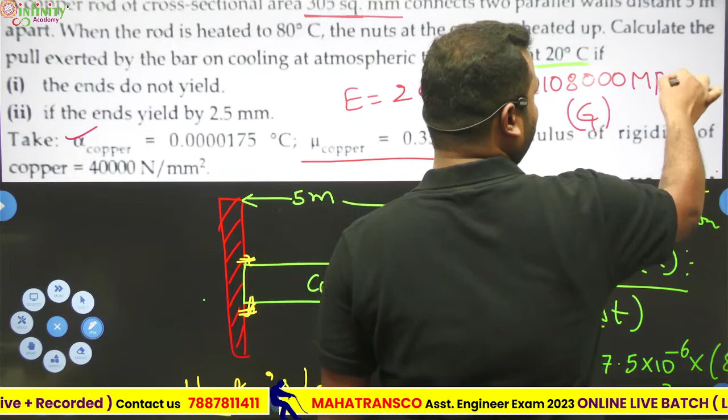Why? Because generally E is greater than G, right? So then what is the unit? MPa. Newton per mm square is nothing but megapascal. So all these are the most fundamental parameters you should remember. This is E. So as per Hooke's law, stress developed is equal to E into delta L by L. This is the most fundamental Hooke's law formula. Now how much is delta L? This one. L is known to us. E we have calculated. Now find the stress. Tell me the stress, how much it is?

Correct. Not 11 point, some calculation error. You please check it. Exactly. How much is it? See, everyone, please use a calculator. Without a calculator, you can't get it. So tell me the answer. See, everything is here.

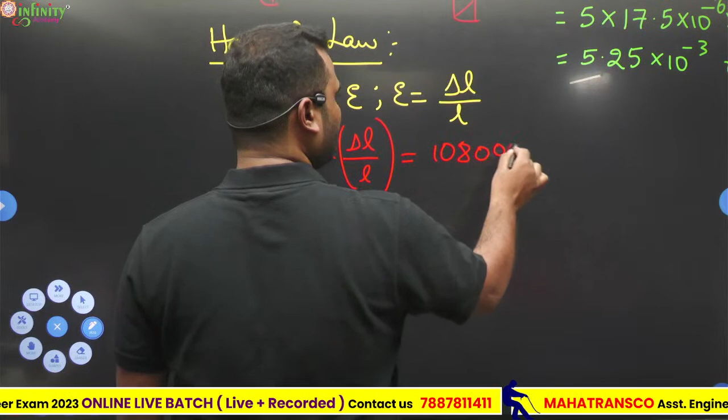Let me write: 108,000 into 5.25 into 10 to the power minus 3 by 5. Come on, tell me. Use a calculator. I know using a calculator will also give some wrong calculations. That is why I told you in the beginning itself: if your final answer is wrong, full marks are not going to be cut, but definitely there will be a deduction. How much? 113.4 units. Please tell me with units.

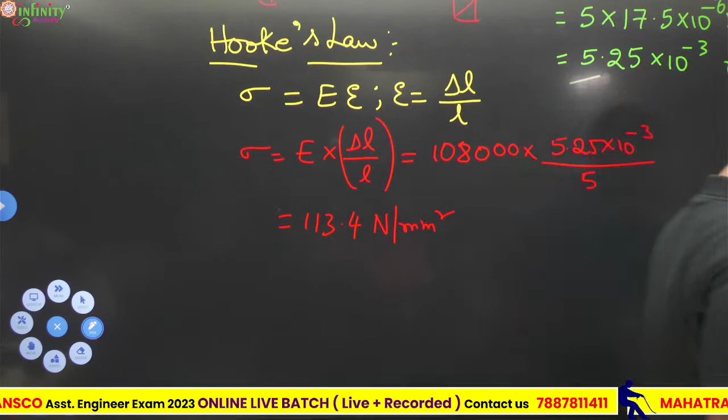Newton per mm square, you can say. But what is asked in the question? Please see the question once. He is asking the pull. Pull means force is asked. Now you got the stress. Then what is the pull? Force formula: stress into area.

See, it covers all the first topic concepts of strength of materials, isn't it? Even though it is related to temperature stresses, is it covering all the topics in the first unit or not? All the formulas and concepts of the first unit of strength of materials. This is how the question is going to be. That is why I have chosen this question. It covers the temperature stresses concept, basic Hooke's law, the stress-strain relation, and the stress and force relation. Everything it is covering.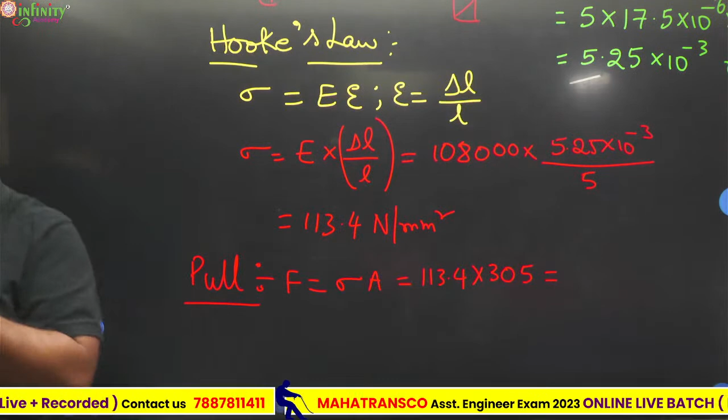So tell me, what is the stress here? Area is how much? Tell me. See, in the beginning you need to write the given also. Tell me how much? 34 point. It means kilonewton. See, be professional. 10 cube generally we take as kilo, 10 raised to 6 as mega, 10 raised to 9 as giga. At least you should remember up to that. Okay.

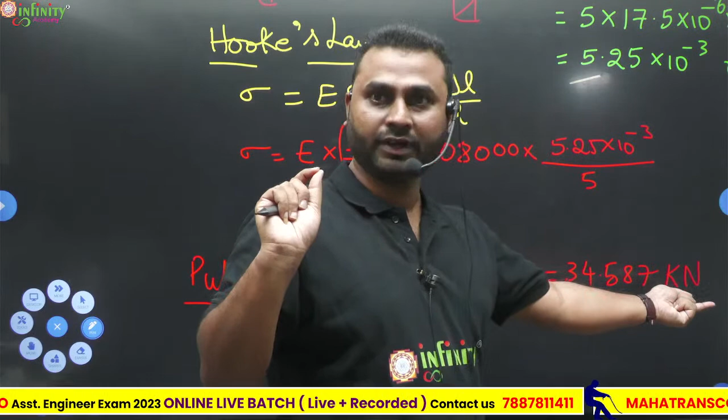How much is it? 34.5 kilo. See, don't tell me just the value. Tell me the value along with the unit. Suppose two persons have the same name; obviously we address them with their surname. The same here. Simply 34.587 means what? So you should address it with the unit. Very important. Units will also carry marks. That is very crucial. Even though it is fundamental and easy, it will have marks.

Clear, all of you? Any difficulty here? See the application. This is what I told you: theory, formula and application. What is the theory required to solve this question? If there is free expansion and contraction, there are no thermal stresses. But once those expansions and contractions are restricted, stresses will develop. That is what we have calculated, and based on that stress, we have calculated the pull also. This much pull the copper rod is exerting on those parallel walls.

So online students, is it clear? Yeah, Neha and Om Shivanand, correct. Good. They also gave their answers. So clear, all of you? Online students, please respond.

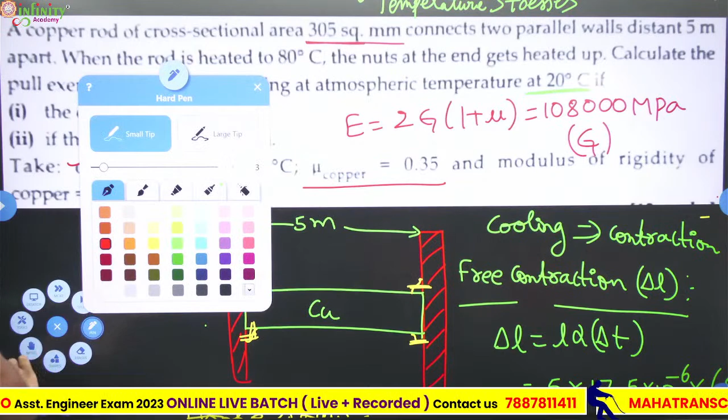Now see the next part. Based on this concept, can you solve the next part? I'll give you 2 to 3 minutes of time. Why? Because in the examination you don't have the whole day to solve the question, right? Come on, do the second part of this question. This is the next level, a further concept. Online students, start doing the second part.

See, if you have any doubt, please ask me. Don't hesitate. Don't think that your doubt is silly or that it is intellectual. Doubt has no such classification. A doubt is a doubt that should be rectified. Please ask in the class itself. In the examination, no one will answer you. While attempting the questions, many doubts will arise, and at that time no one is there to answer you.

But here in the class, I am here or any other concerned faculty will be there. Please be clear with all the doubts. Doubts usually arise, and they should arise. And those doubts should be rectified. Then only you will get conceptual clarity. Therefore, whatever doubts you have, any one of you, please feel free to ask.

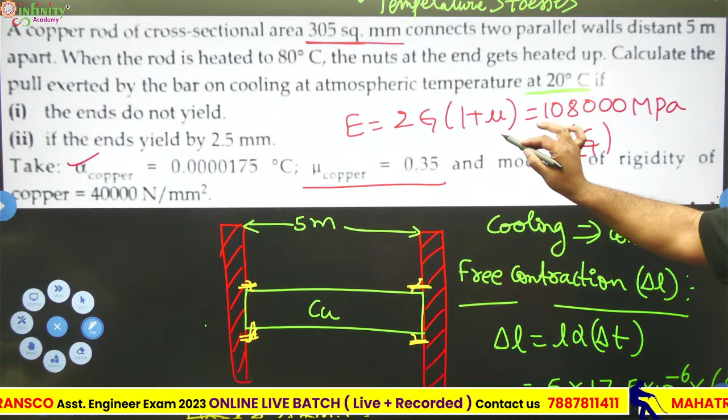Same formula. Use of mu. So already we have made use of it, as I told. See, I am telling you, the second part is an extension to the first part. So whatever you have done in the first part, you need to make use of that. Along with that, some addition is there. Correct. Good. His answer is correct. What about others? So by solving the first part, you are easily able to solve the second part, provided you have that clarity. This is what application means. Nothing new.

So how much is it? 18 point. Correct. See, tell me with unit. Please tell me with unit. Okay, try to make a habit of it. Okay, correct. What about others? Do you face any difficulty in solving that? See, don't hesitate. Whatever you feel, please express it genuinely. Don't hide anything related to the subject. Others also. I want answers from others also.

See, from tomorrow onwards, everyone should carry a calculator. And whatever subjects are completed, please start solving conventional questions. As I told you, you should feel responsible by yourself. Even though you might have joined coaching, this is not everything. Finally, you need to reach your goal. So start solving the conventional questions. We are going to provide them too, no worry. But before that also, please start it. Almost 5 to 10 minutes.

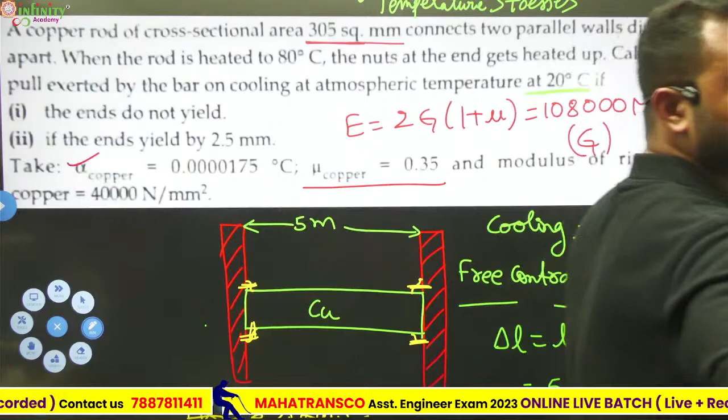So online students, did any one of you get the answer? Do it fast. Tell me with unit. Correct. Good. So what about others? See, same theory and formula, nothing new. Same theory and formula, but application. What is the answer? So, last.

So if you have any doubts, I have given the time, please ask now itself. Even though it is not completed, it is a fundamental question based on strength of materials. That is why I have given a question from the first unit of strength of materials, not the other units, or on principal stresses. For that, for sure, you require explanation or completion of the subject. But for this, it is not required. Simple stress-strain formula, Hooke's law formula, and stress and force formula. Simple formulas. That is why I have given this question.

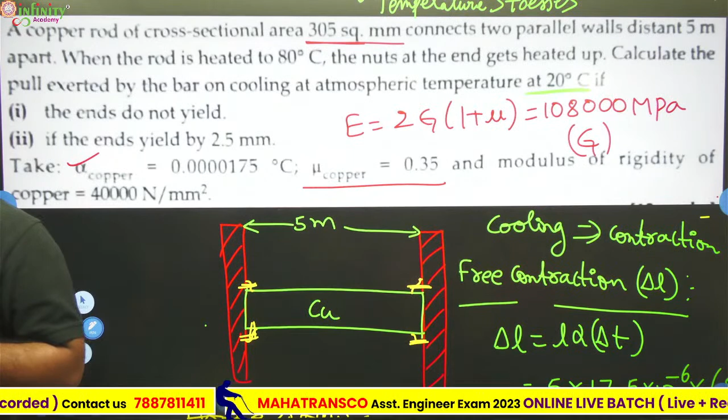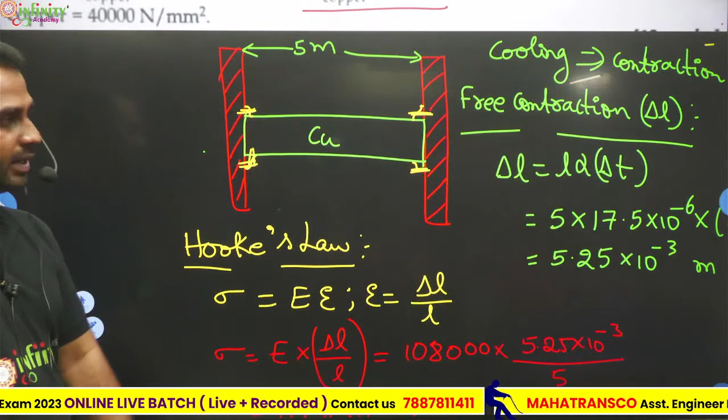So see here, what is the second question, all of you? See, only two online. What about online students? Did you get the answer? Okay, listen, concentrate. So what is said in this second part? If the ends yield by 2.5 mm. Ends means these two walls. Yielded means they have expanded or contracted, whatever it may be. But here, as per the question, it should be contraction.

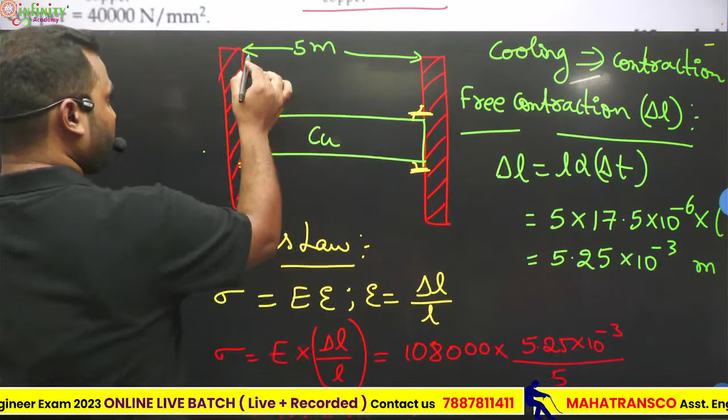So why? Because of the fall in temperature, this copper rod tends to contract. In that process, this copper rod is going to exert a pull on the walls. If those walls are able to withstand that pull, then they will not move or yield, isn't it? If the walls are strong enough, they will not move, meaning they will not yield. That is the first case. Now what is the second case? Now the walls have yielded 2.5 mm. It means this is the new position of the wall.

Now this is the new position of the wall, please observe here. So on both sides the yield will be there. What is the total yield? 2.5 mm. Now on both sides how much it should be? Half of it, right? That is 2.5 by 2. How much is it? 1 point...

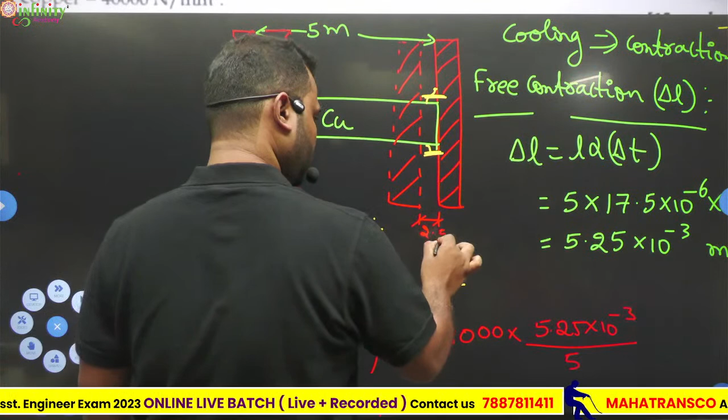Now what is the net contraction? So what is the total contraction? 5.25 mm. What is the total contraction? 5.25 mm. So that is the contraction the copper rod can exhibit.

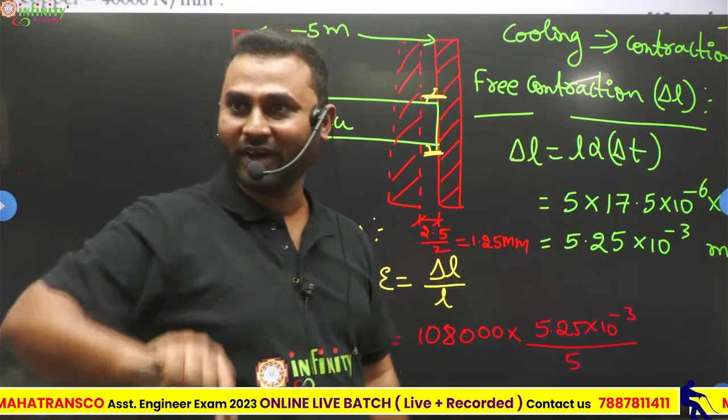In that process, that copper rod has pulled the walls along with it. How much has it pulled? 2.5 mm. Now what is the net contraction? This 5.25 minus 2.5, isn't it? So tell me, is any new formula used here? Application. Is any new formula used? No, it's application. That is why I told you, application is the most crucial part. Right, see.

So now net contraction - let it be delta L1. So net contraction delta L1 is equal to delta L initial minus yield of the supports, that is yield of that ends, or you can say supports. Then what is the delta L we calculated in the first question? 5.25 mm. Now here I am taking in mm, not in meter. Okay, 5.25 mm minus 2.5. How much is it? Please tell me. 2.75. Okay.

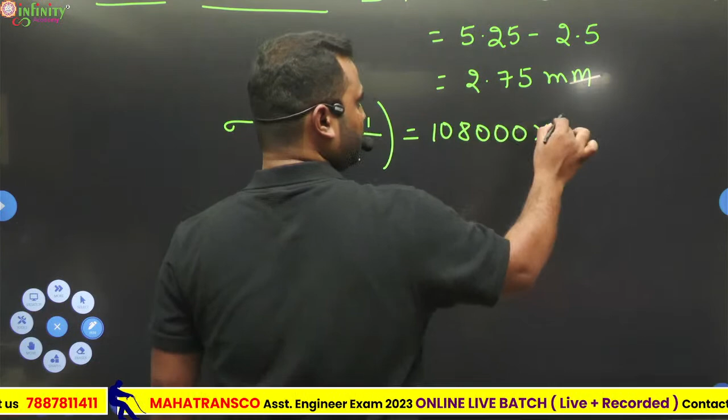Then same formula, stress. What is the stress formula? Stress is equal to E into delta L1. This time it is delta L1, net we need to take by L. That is 108,000 into 2.75 by, this is in mm. Now please take length in mm, or in similar way also you can do 10 to the power minus 3.

How much is the stress? Please tell me the stress. 59.4 Newton per mm square. Now pull, let it be sigma 1. So sigma 1 into A, that is 59.4 into what is the area? 305. Yeah, tell me the answer. 18.117 kilonewton. That's it.

All of you, tell me, did I use any new formula? Any new concept? Just application - this is what application is all about. And that too, this is the most fundamental question we can expect from the first unit of strength of materials. So this is how we do that question practice session. With this one question, we have revised Hooke's law, that is stress strain relation, and relation between force and stress, that is axial stresses, and then temperature stresses. In temperature stresses, we have done both cases - support yielding and no yield of the support. That's it.

Clear all of you? This is what is required. So merely studying will not give you the marks or result. Of course, you need to study, as I told you, that is the first step - learning the theory, attending the classes. But after that, there are steps more important - practice, practice, practice. That's it. Clear all of you?

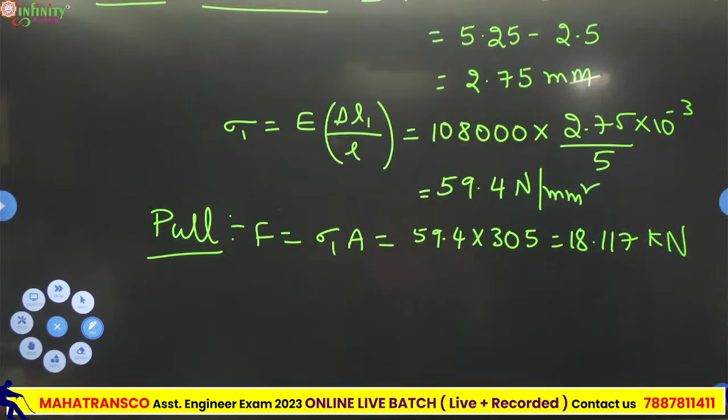For numerical problems, there's no conclusion needed - the answer is the conclusion. Those extra decorations are not required, right? Answer itself is the conclusion. You are not supposed to decorate the answer sheet - just the final answer. Why? Because we don't have that time in the final examination. After getting the answer, we need to proceed to the next question quickly - we don't have that much time. No such conclusion needed, the answer itself. If you want, you just highlight F is equal to 18.117 kilonewton and move on. So the answer itself is the conclusion. And even in theoretical questions, just a second - even there, conclusion is not needed for all questions.

That is a framework that should not be followed for all questions - it depends. Is there a page limit? MPSC, since it's not been conducted from 2011, but in UPSC, for each question they will give the space - so a limit is there. That is why practice matters. So they may give 1 page or 1.5 pages or 2 pages, and accordingly you need to plan. That is why I am telling you, for a 5 marks question or a 20 marks question, you need to answer accordingly. For 5 marks, how many pages? We can't say exactly, but maybe 1 page or 1.5 pages, it depends - mainly 1 page. If it's 20 marks, then 2 pages.